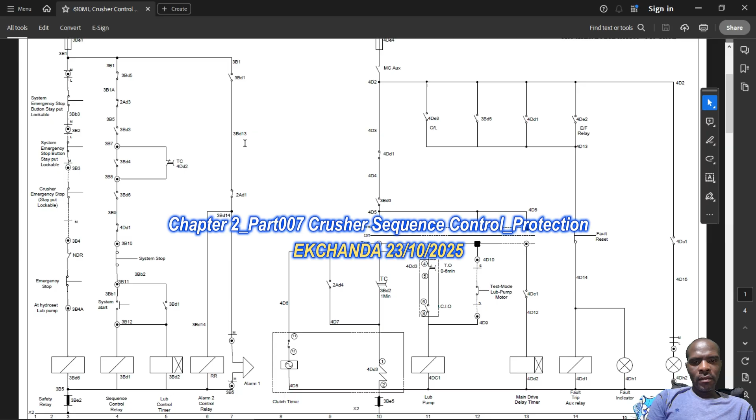Electrical control circuit for both the crusher lubrication control and crusher main drive control, because they are interdependent in the way they work. Okay, so ngamwamo na okay.

Apa I'll just be referring to ama rungs. Okay, ama rungs like ladder rung 3, 4, 5, 6 and whatnot. There are rungs in the way that they've been arranged, like ngama lolesha yale moneka kwa mass steps ya ladder.

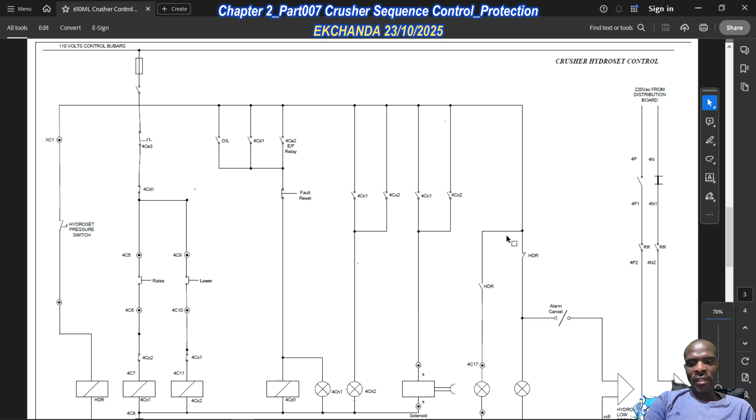So this is ladder rung number 3 because the 3 is down here. Okay, and then here you have the last ladder rung number 16. So mwala mona tuyonsaya yadi labeled ama rungs yonsaya. And also you notice that just underneath the ladder rung, okay, paleba ututuma contacts ututu the punch up.

These, whenever you see these, just know that my auxiliary contacts here are my control relays. Okay, that's where they belong. They are basically just auxiliary contacts for the control relays. So don't get confused about this, in the sense that, for instance, that control relay 3BD6 down here has been used in rung number 4, 10 and 29.

Mudi rung number 4 is being used as a normally closed contact. So 3BD6 is used as a normally closed contact. Actually, this was a mistake. It's supposed to be normally open, in the sense that

3BD6, the normal condition here, is constantly energized under normal operating conditions, which is why Ngaidi normally open and this is constantly energized, so this normally open contact is supposed to close, which is the only way mwalamba the system, because Ngamawomfia normally closed mudi rung number 4, then this will always be open tetimwambe. So mudi rung number 4 is used as normally open.

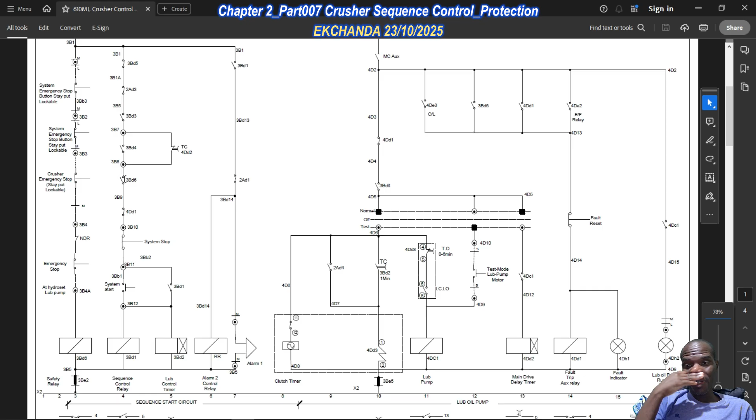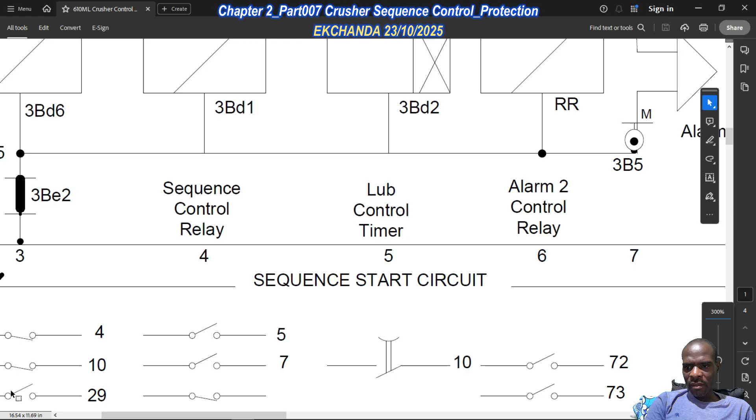Okay, and then ngamwaisado le shapari mudi 10. Okay, so 3BD6 is used as normally open, which is again the same thing, or maybe it could be... no, this is open, this is closed. So these 4 and 10 were supposed to be open. Okay, in this representation 4 and 10, they were supposed to be normally open.

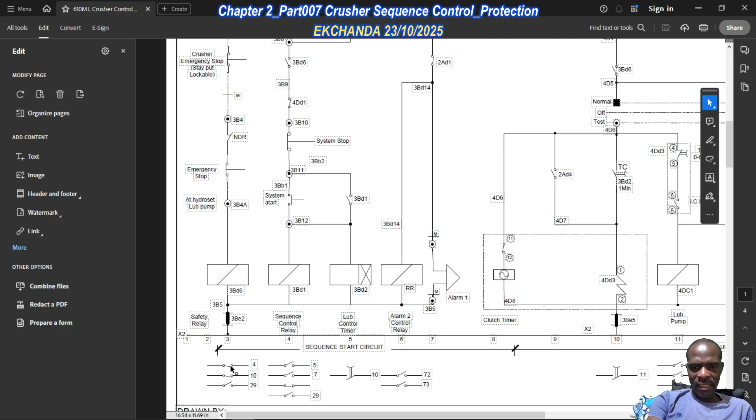I don't know if this part is editable. Apparently it's not identified as something which can be edited, so we'll leave it at that. But we just need to understand that mudi rung 4 and rung 10, they're supposed to be used as normally open, because clearly they've been used as normally open contacts. Okay, I don't know how they messed up this thing down here.

And then if we look at 3BD1, we'll learn that mudi rung 5 is used as normally open, rung 7 as normally open. So 3BD1, we're looking for rung 5. Yes, it's used as normally open. And in rung 7, it should also be used as normally open, which is correct. Okay, so now that we've got that out of the way, we can just briefly go over how this circuit works.

Okay, so mwala monat mudi rung number 3, it's just talking about protection, because yonsaya my emergency push buttons. Okay, system emergency stop, stay put, lockable. Okay, so it's those which when you press it latches and then you have to unlock it. Okay, but apparently in this case it's also got that lockable function. So that's the first part.

And then to simplify things, we just understand that mostly we can think of any control system as having a sequence part. Like for us, we'll think of it in 2 terms. There's a particular configuration which deals with the sequence, okay, how the system is supposed to start. Ichambila poni chisa, olopa konka chisa, and whatnot. Okay, so that's the sequence part. Then, kwaisabana part dealing na protection.

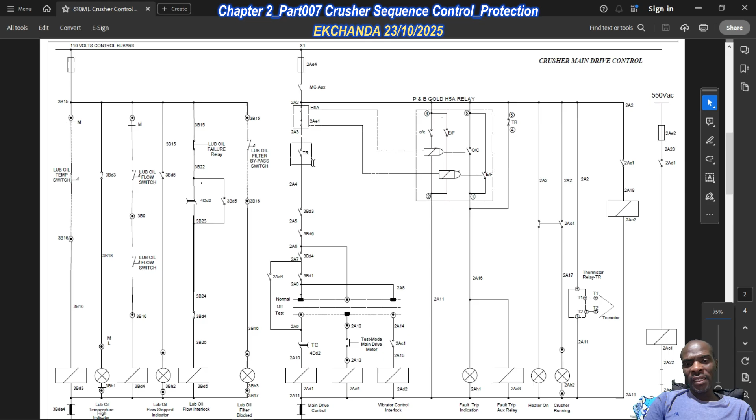And then TR is just the thermistor relay for the main drive, essentially talking about temperature protection. Okay, if it's healthy, we assume that under normal condition this contact is supposed to be closed. So you're coming down, 3BD3 was the lub oil temperature, I think. So this 3BD3 is the lub oil temperature. The lub oil temperature is normal, you close there. 3BD6, you haven't pressed the emergency push button, so this is healthy, you come down here.

3BD4, we are saying there should be a flow in the system. Okay, this is 3BD4, flow switch 1 closes, flow switch 2 closes, and 3BD4 is energized, and this closes right there. Okay, so which is where you notice that if there's no flow in the system, you cannot run the crusher. You can't just run it like that. So there needs to be flow in the system. 3BD4 is going to be closed.

3BD1 is the sequence control relay, like we previously saw. It's there, and then you're in the normal position, and then the main drive delay time has timed out, so this closes, and there you go, your main drive has started. So that's how this is going to work. Okay, so APA,

of your level. So the whole point is we can think of protection as being in two levels. We can think of level 1 protection, which basically disrupts the normal system stop sequence. Level 2 is a fault, yes, but it stops the system by way of the normal sequence. So level 1 disrupts the whole sequence of stopping, meaning you get a level 1 fault, or you actuate the emergency push button, the crusher main drive motor will stop, then the lubrication pump motor will stop irrespective of

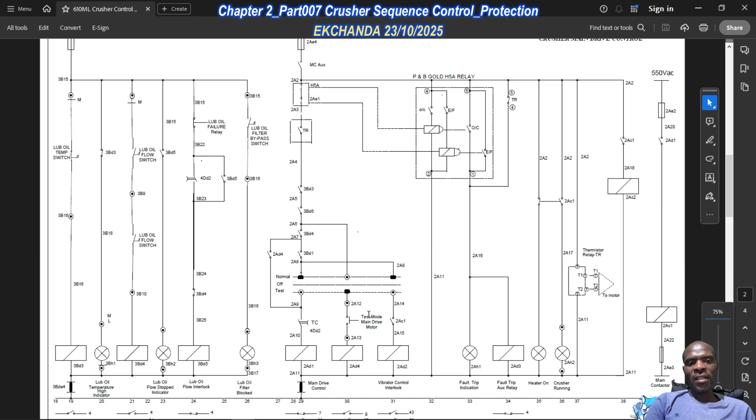the sequence. But if you get a fault, which we are going to refer to as level 2, in that case it's going to just function as a normal system stop in a way, right? Because it's going to just de-energize the sequence control relay and allow the system to stop normally. It's going to just allow the lubrication pump to power down following the sequence, as opposed to the level 1 protection, which just shuts down everything irrespective of the determined operational sequence.

Okay, so my point is, when we create our logic, we are first going to create two functions, right? Here first twalaita ati level 1 protection, here second twalaita ati level 2 protection. We don't have to, but we're just trying to have fun with this.

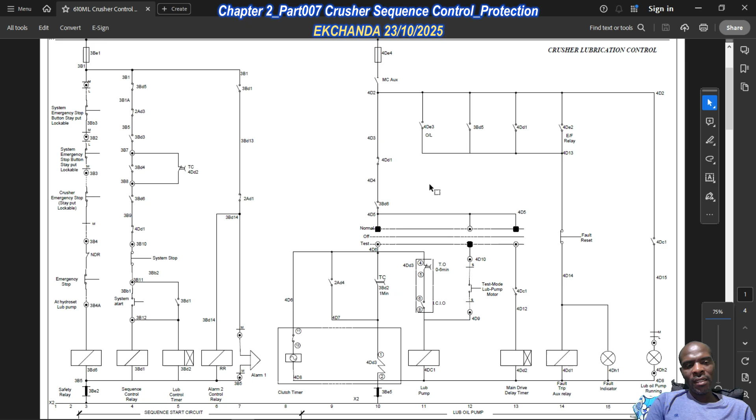So that said, we're going to insert an object, insert function, the language, let's use ladder, and then protection, symbolic name, we're going to say protection level 1. Okay, what do we have to say? It's, apparently, I don't know, maybe I'm online or whatnot. So we're going to call this as level 1 protection, and then we're going to insert another function. Or maybe let's just copy this.

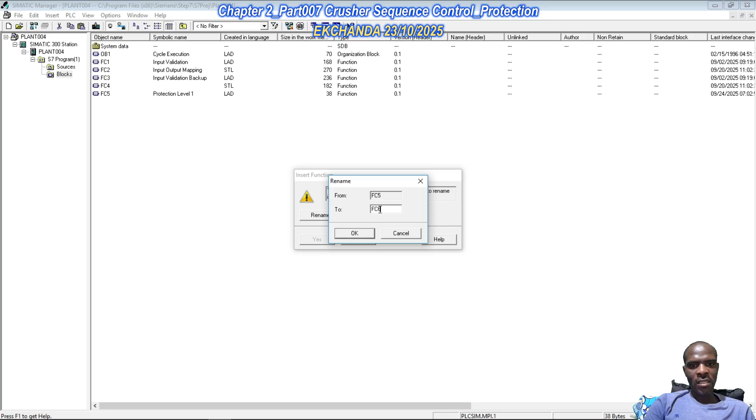We can copy, and then we can paste this, rename, we'll call this function 6, and then object properties, and then we're going to say protection level 2. Okay, this, no, we need to call this in OB1, but for now let's just skip that part.

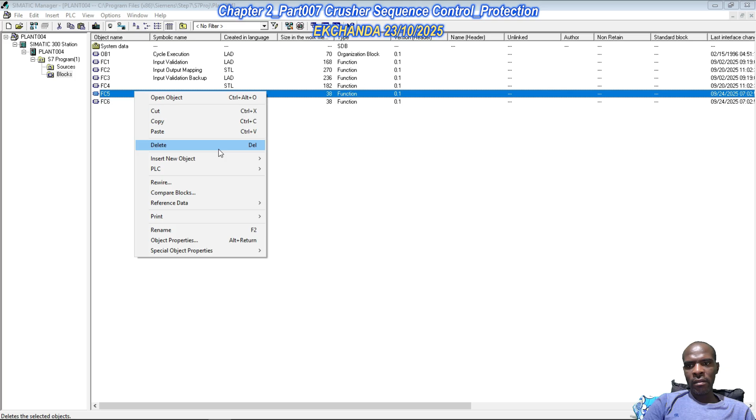Code block open. What is happening here? You're lost. It's just open. You're like code block open, but you're not in the OB. What's wrong with you? So options, view, overviews. Okay, this is what we get. So this is level 1 protection. Let's do this, and let's do that, so that we see them side by side.

Level 1 protection. Essentially, we're saying that we need all those functions or inputs which are going to stop the system immediately, irrespective of the sequence. So clearly, in rung 3, we just need what is being termed as a safety relay, right? So we're going to insert how many normally closed contacts? 1, 2, 3, 4. I don't know what NDR is because it wasn't really explained. There's no legend to explain what NDR was. So 1, 2, 3, 4, and then an output coil.

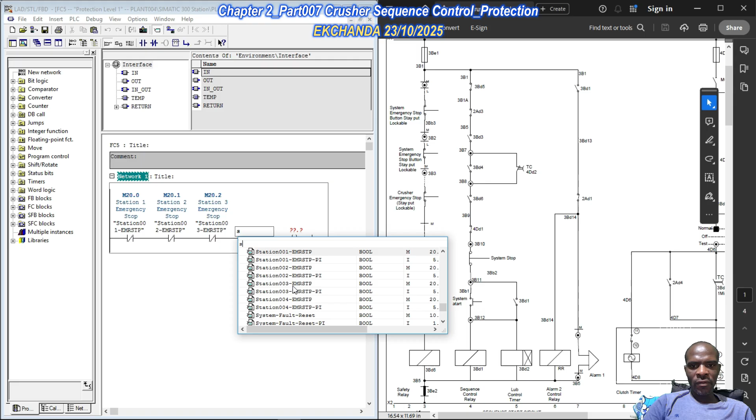And then what do we have? This is an emergency, insert symbol, station 1, if I remember correctly. Insert symbol. Should I just say station 2? But we need memory addresses. So this is station 2, and then we need station 3, and then we need station 4, right? Like so. And then we're talking about 3BD6. So let's see, 3BD6 is right there. So this takes care of the first rung, the one which is rung 3.

So the other thing we need now is just insert a network, and then we're going to think of which other system. So 3BD6 is here, and then 4DD1 is here. So these are level 1 events, level 1 protection events. So let's look at 4DD1 like so. You notice that 4DD1 is actually what?

Is actually a consequence of there being a fault in the lube system, okay. So this is the lubrication pump. So 4DE3 and 4DE2 are respectively the thermal overload and the earth leakage protection for the lubrication pump, okay. So this lubrication pump has got these two protections. And then 3BD5, like we previously said, was a no flow condition.

So it's also a level 1 event, because any fault that has to do with the lubrication pump is a level 1 protection event, which is what we have in here, protection level 1. Anyway, we just use them the way they are. But if you wanted to have fun with this, the question would be, what's the normal state of these inputs? Like, what's the normal state of 4DE3? What's the normal state of

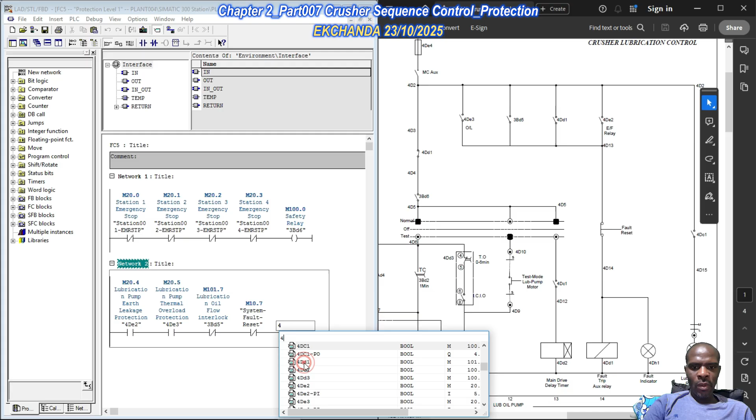System fault reset, and then we're going to have an output coil which is designated as 4DD1, which is this one here. Fault reset, and then they're saying we need to seal in through 4DD1.

So there are two ways we can do this. Let me just show you what I mean. We can do the same thing, but we could have done it like this. Okay, you're not Rockwell. You can choose to do it like this so that we don't have to seal in through 4DD1. But then we wouldn't be needing this.

But what are we saying? True, true, true. So the result of logic operation in this position will be true. This will be set, but we only need this to be set under fault conditions, right? So we're going to negate the result of logic operation after 3BD5. So if the signal state of this is true, true, and if this is not energized, the result of logic operation before the negation will be true. After the negation, it will be false.

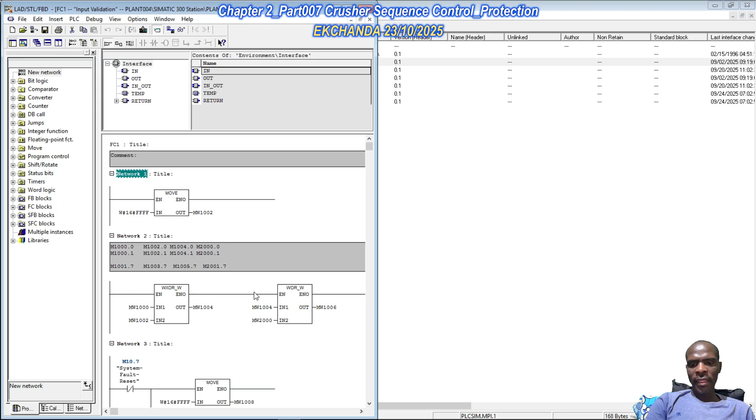So when we're talking about input validation, essentially whatever input there was, if the input had anything to do with protection, we needed to reset to normalize the system. So if there's a fault in the system, a fault in the lubrication system, the faulted state will be latched by way of the configuration we have created in these networks. So that's essentially what's going to happen.

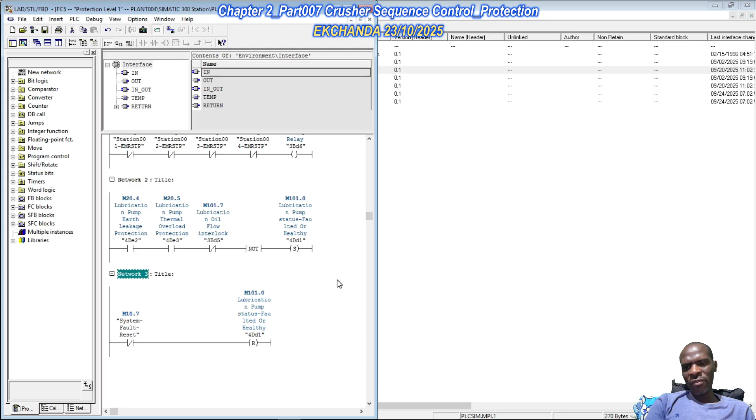So you'd notice that actually we don't need to worry about this, because of where we've come from. We know that if there's a fault, let's say by way of the earth leakage or thermal overload, the faulted state as passed on to the system is going to be latched, so we need to reset to normalize. Which brings us to what situation this is.

So I'm claiming that the normal state is supposed to be true, and if this is okay, there's flow, this won't be energized, so the result of logic operation at this point will be true. And then this won't be set. So that's the thing I'm trying to say, right?

But would it work if, as opposed to using a set instruction, we just delete this and use a normal output coil? There's nothing wrong with that. It can still work, but I'm thinking this would be more ideal considering what we have configured with the latching of the inputs and all that. Because if any of these get into a faulted state, this won't reset.

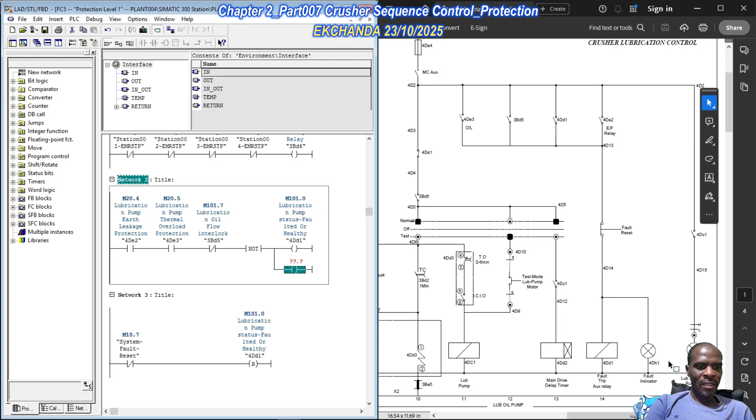So we get another output coil, but this time we're going to assign the fault indicator lamp for the lubrication pump, 4DH1. Like so. This is what we get. Then of course we don't need this as it is. I know it looks different, but I've done this based on where we've come from.

Again, let me repeat myself. When we're talking about input validation, we said that all those functions which had to do with protection, we were supposed to monitor the transitions in their state. Meaning, if there's a fault in the thermal overload, in the earth leakage protection, or any other protection aspect, or a transition in the emergency push buttons, to normalize the PLC input signals we needed to reset.

So if any of these come through as faulted states, they won't change state regardless of whatever happens external to the system, right? And because we're using a negation instruction in this position, if these change state from true to false, the result of logic operation at this point will be false. And then after the negation, it will be true.

And then you get your signal here, lubrication pump status faulted or healthy, in which case this is the fault trip auxiliary relay. So this is going to be energized, and then you know that the system is faulted. And then of course you get your indicator lamp right there. So that's how this is going to work.

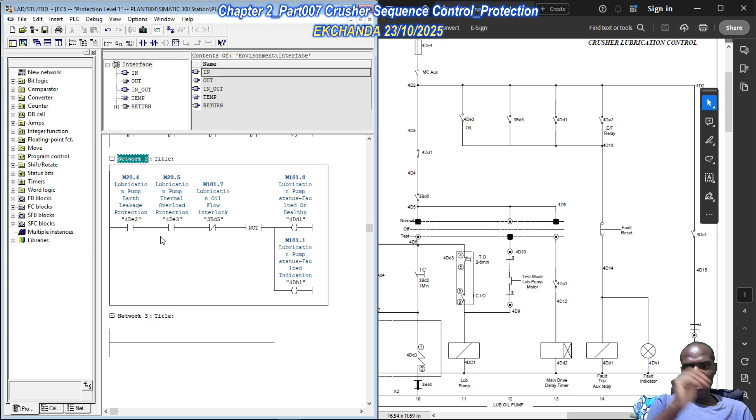This applies here because these were also mapped in the input validation function. So this takes care of that, and we are good to go with this network here, or this rung if you want. So we've taken care of this branch, it's of no problem. And then of course we've taken care of 3BD6 in network 1.

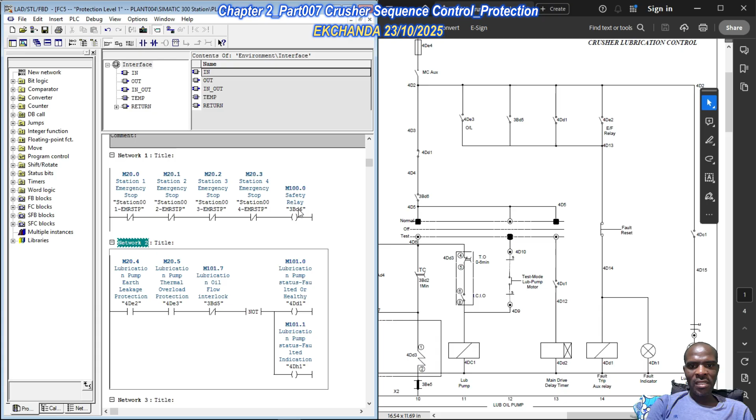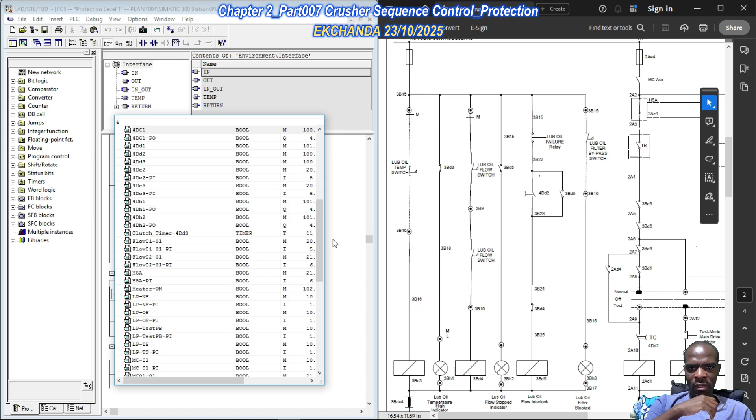In this particular case, we're saying normally open across a parallel connection, normally open like so, and then it's going to go to a reset. We need a reset. We've done this part, then we need 3BD4 as normally closed, and then of course we have 3BD5. So this one here becomes 4DD2. I think we did label this as 4DD2 under timers. What did we say about 4DD2?

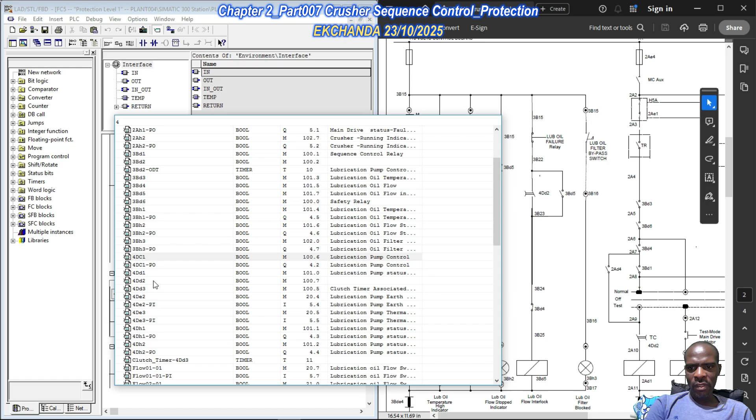Why is it like this? It's a timer, main drive delay timer, okay? So main drive delay timer was 4DD2, so meaning 4DD2 was classified as what? Just 4DD2 was classified as just an output coil for that timer, okay? So we need to assign this output to that particular timer when we get to that, okay?

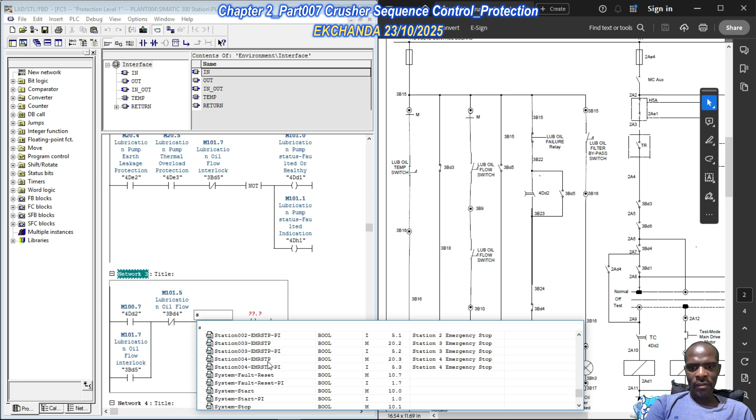So that takes care of 4DD2, and then of course 3BD5, and then what do we need? 3BD4, and then we've got system fault reset. Got a system fault reset, and then of course we've got 3BD5, okay? Got 3BD5. So we've taken care of this, right? Because we've got the lub oil failure relay. I think this is just a reset, which we're calling the system fault reset.

And then there's an OR configuration or a parallel configuration between 4DD2 and 3BD5. So 4DD2, 3BD5, and then in series with the flow, okay? The flow relay, the flow control relay, because 3BD4 is only energized as a consequence of there being a flow. So flow switch 1 closes, flow switch 2 closes, and then 3BD4 is energized, okay? So we have this.

Main drive delay timer. So by the time the main drive delay timer is closing, there should be flow. Okay, that's just what this is saying. Main drive delay timer, when that timer 4DD2 times out, it's going to close here. And then at that point, if there's no flow in the system, 3BD5 is going to be energized. Okay, so we have this. This whole thing here is this one in the PLC. Okay, so this is 3BD5.

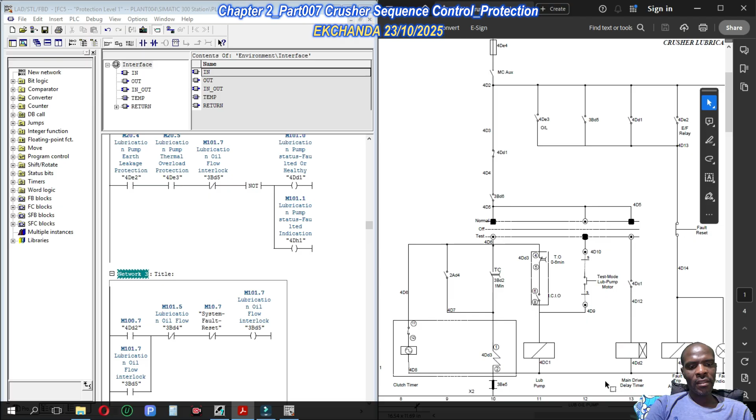We've taken care of 3BD5 as a system level event. So this is 3BD5, and then of course it's supposed to also be in the lubrication control, okay, which is why it's a level one protection event. 3BD3. So 3BD3 is what? Is lub oil temperature. Okay, so lub oil temperature is this one here. I'm calling it the lub oil temperature because of the way it's being brought in. Lub oil temperature switch, then there's 3BD3.

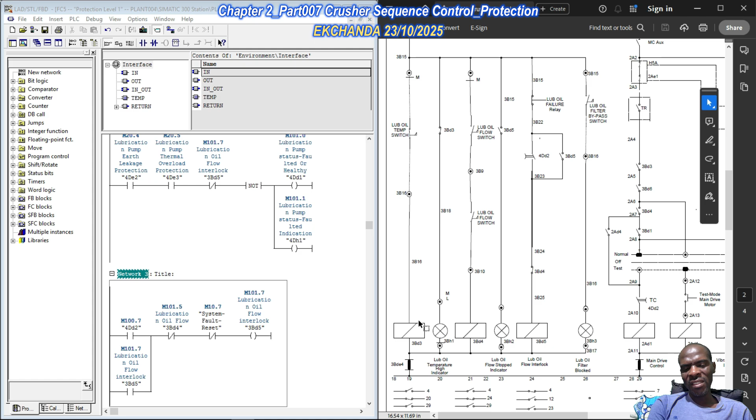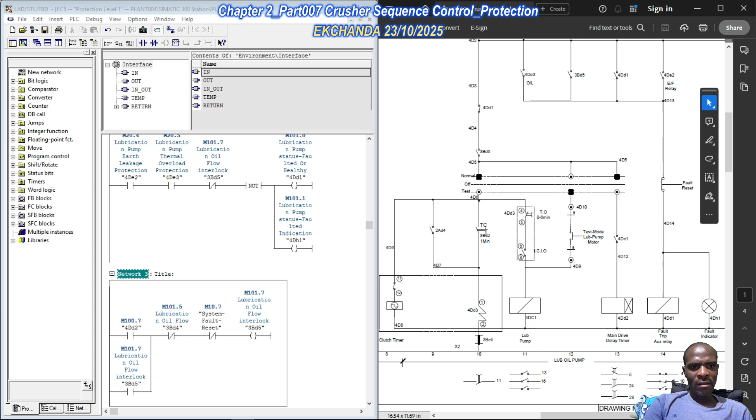So this is basically the control relay monitoring the temperature condition of the oil. Okay, so if it's being used in this condition, it means the normal condition of 3BD3 as a control relay is supposed to be energized. 3BD3 has got no immediate effect on the operation of the lubrication pump, because if you see in this run, from top we just have 4DD1, 3BD6. There's no 3BD3 anywhere in this. Okay, so clearly 3BD3 is not a level 1 protection function, but level 2.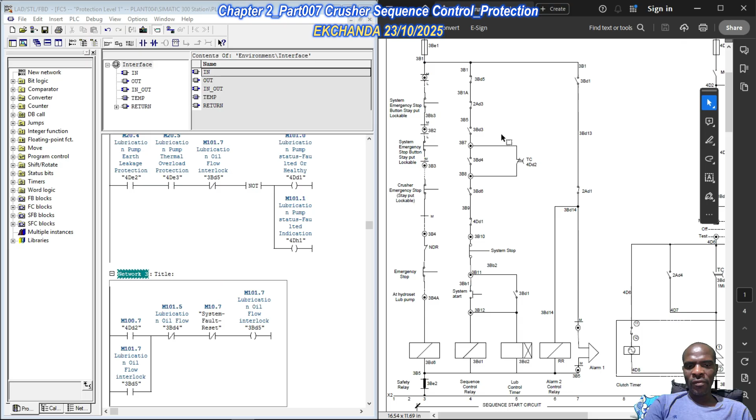Okay, level 1 has to stop both the crusher main drive, and then it has to stop the lubrication pump irrespective of the sequence. A level 2 protection function, according to us, is just supposed to stop the system normally, in the sense that it's not a fault directly related to the lubrication pump. It's a fault directly related to the operation of the main drive itself. Okay, whether thermal overload or earth leakage or whatever it is.

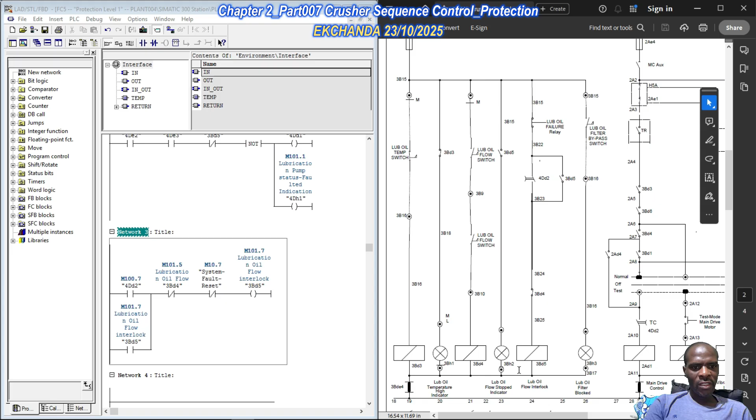Okay, so 3BD5 is used here. 3BH2 as a lube oil flow stopped indicator. Okay, so we're saying if we energize, we can do it like this, put an output coil, and then do what? 3BH1, is it 3BH2? Okay, so we can do 3BH2 like so. Okay, now 3BH2, and then pause.

Okay, so we've taken care of the lube oil flow stopped indicator, okay, which is the one associated with the auxiliary contact of 3BD5, but internally in the PLC we just do it like this. Okay, what do we have? What else do we need?

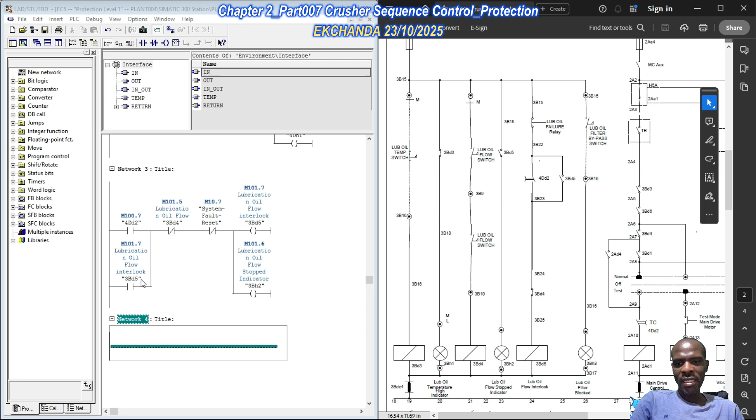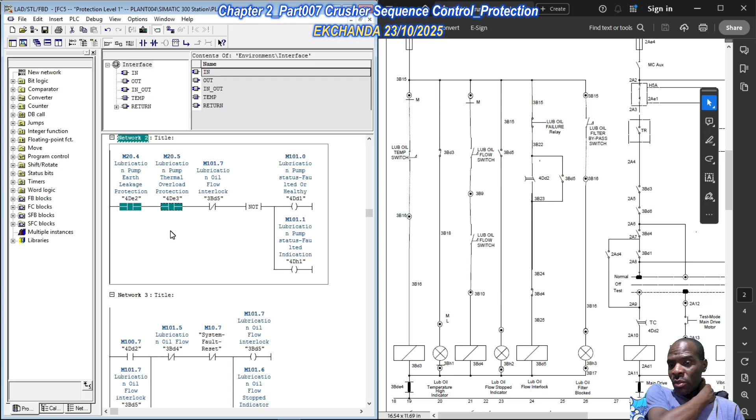Again, at this point you're like, but why are we using a seal-in contact? Because the difference is these contacts are a consequence of being physical inputs, which is why they're already mapped in the input validation, and that input validation is at that reset function configured in that particular network. This is different in this case because all of the associated addresses in this network are basically resultant conditions. They are not physical inputs, so that's the difference, and that's why we need to seal in like the way we've just done.

So up here, we've taken care of what? We've taken care of rung 24, which is the lube oil flow interlock 3BD5, and we've taken care of the one which is talking about the indication, lube oil flow stopped indication 3BH2. We're not going to leave 3BD4 in this function, which is being called protection level 1. So we're not doing anything with this rung here. Rung 21 will not be touched.

3BD3 is actually a level 2 protection event, because if the lubrication oil temperature is high, it's just going to stop the sequence control relay, and the system will stop normally. So it's a level 2 protection function. So we were not going to deal with rung 19 and 20, but rather just rung 24 and 23.

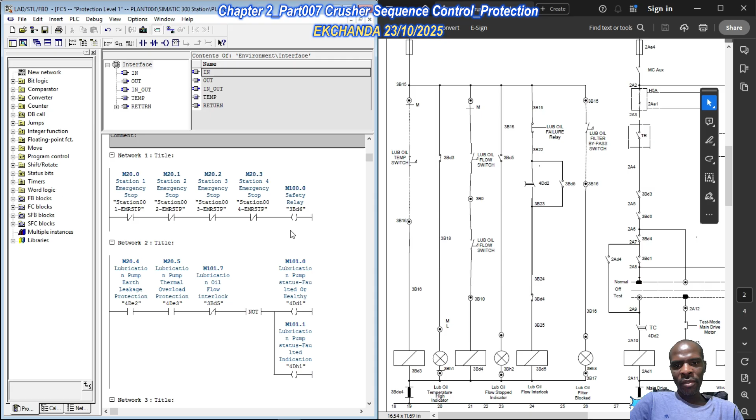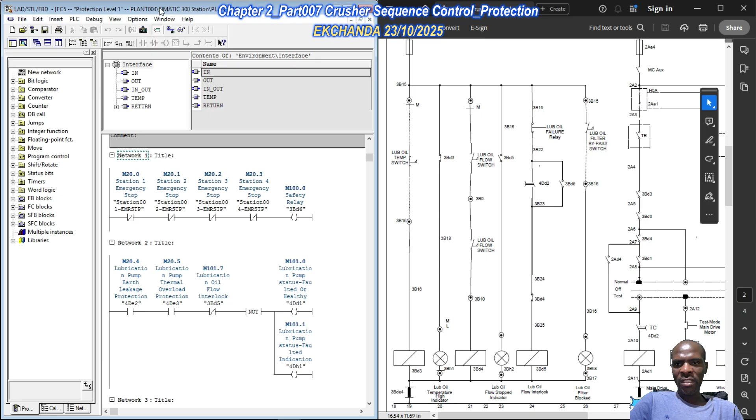So now what we'll do is we'll get to answer one very fine question. What's the normal state of 3BD6? 3BD6. In this particular regard, I feel we need to use a negation, because the normal state of these, because of the mapping that we've actually done, or rather, let me just show you something so you're not like, oh, but what are you talking about? So this is protection level 1. I'm going to close it for now.

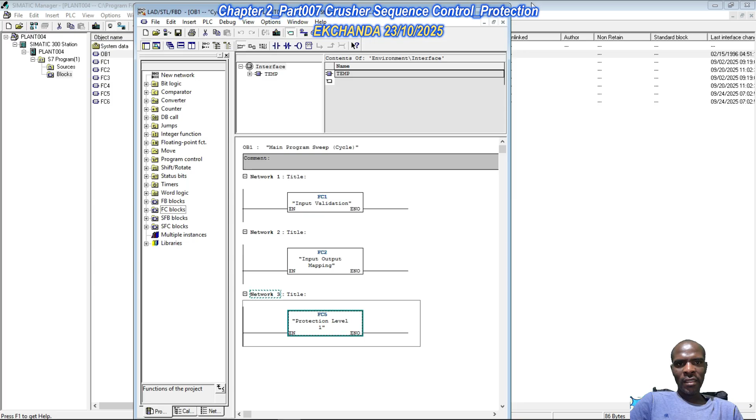Protection level 1 needs to be called in OB1. Go to insert a network, and then functions, protection level 1. I think this is protection level 1. We need that. This is station 1 emergency. Station 1 emergency relates to this one here. But you notice that the signal state being passed on to the station 1 emergency stop memory bit, because we are programming using memory bits, what's being passed on to this is a false state.

This only attains a true state if you actuate this. It attains a true state if you unlatch, still true state. But you need to reset to reset the faulted state of the system. So Mukati, the way we did the input validation basically makes it so that some signals to do with protection we are wiring through normally closed contacts. When they come to the PLC, we pass them through the networks for input validation. On the output side, the healthy state is supposed to be the false state. I hope that makes sense.

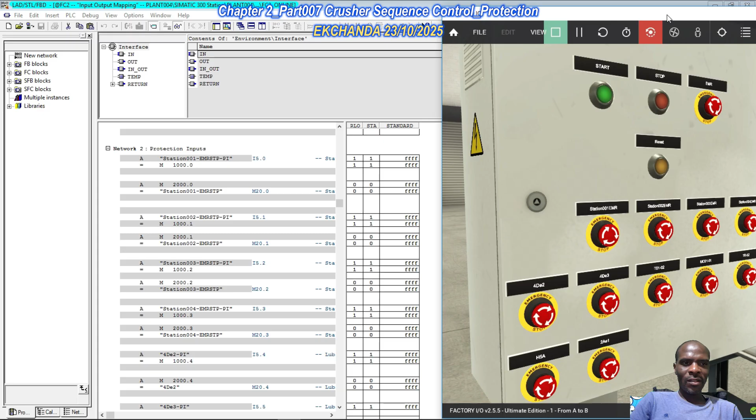I really hope that makes sense, because if you understand that, then that will explain why this is like this. So where external protection instructions are concerned, we need to negate this state. So maybe we just copy this, paste there, and then download this again, so that now 3BD6 will have a false state. And then what else do we need? We're being told that we haven't mapped. I think it's the same.

It's the same thing with 4DE2 and 4DE3. So let's look at 4DE2. Let's look at 4DE3. Okay, so we're actually getting those signals. So essentially what it means, ladies and gentlemen, is that if we're going to use these protection functions internally in our logic, then they need to be wired as normally closed contacts and not normally open. Okay, so that's our truth, like so.

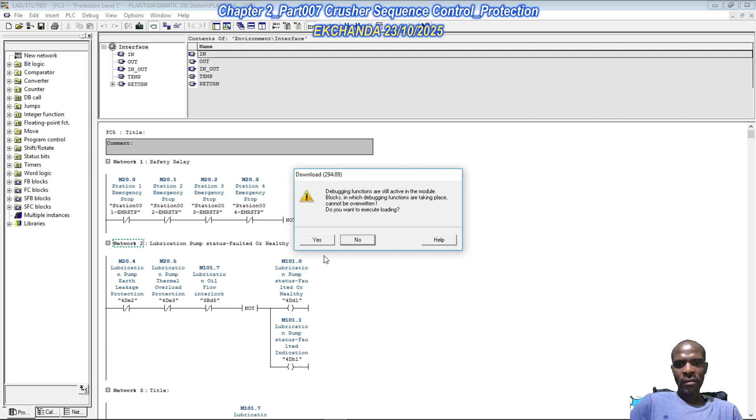It needs to be done like this. Okay, so now this takes care of our little issue.

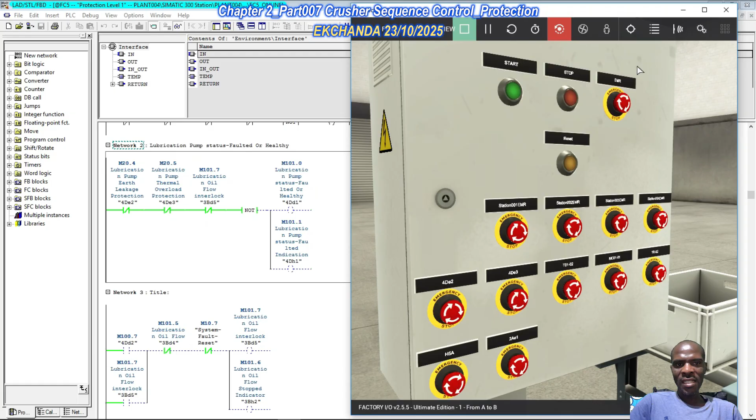Okay, now what I meant when I said we don't need the reset in this function, or in this network, was this: if 4DE2 is actuated, you notice that the lubrication pump status faulted or healthy, this lamp will come on. And it will stay so even if I normalize this. Nothing happens, right? Nothing happens unless I do a reset. Then that's when the state changes. Same thing, it may look different, but it functions in the same way. Okay, so that takes care of this.

And then for 3BD5, what are we saying? 3BD5 is okay like this. It's supposed to be in this de-energized state, right? So what this means now, ladies and gentlemen, if we're going to get out of this protection level 1 function, is we just use normally closed contacts. De-energized, then the output, and then options, symbol table. On the output side of things, we went as far as memory bit 103.0 as a normal output.

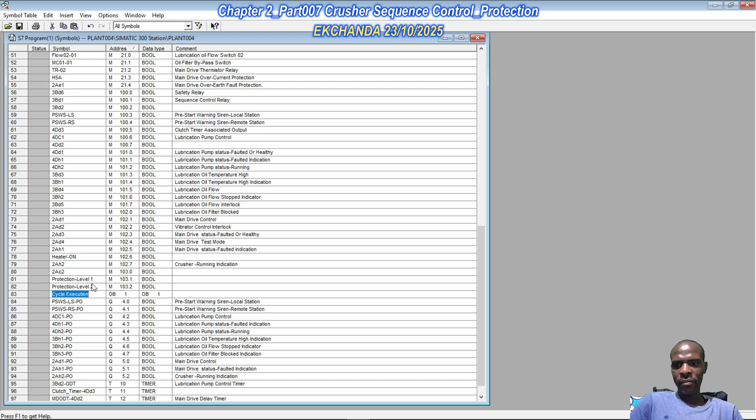So let's do insert symbol, and this we'll just call it protection level 1. Then I know at some point we may need to come back here, insert symbol, copy that, paste there, protection level 2. Then we'll save this, close that, so now all we need is get this, paste there, get this one here, paste there, get this one 3BD5, paste there, and then protection level 1, and then we need to negate. Seeing as how we already have this, we'll get that true, false, like that. Save this, download, and then we have something like this.

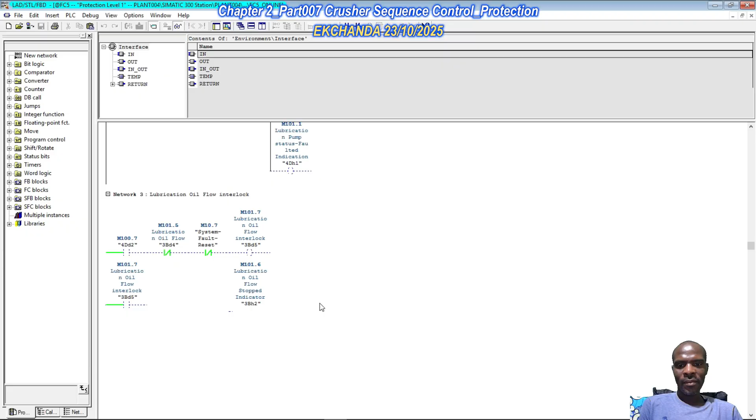So when the system is healthy, like everything is okay, wherever we need a level 1 protection event, all we need is to come and pick this, slap it on there, and we're good to go. So if the program was to grow, you're going to introduce other additional protection functions. You just come in this particular function 5, add your network, add your condition, and still maintain the protection level 1 contact wherever you've used it.

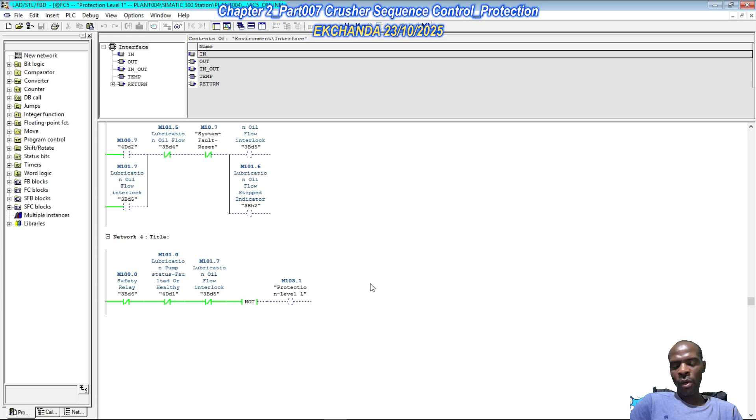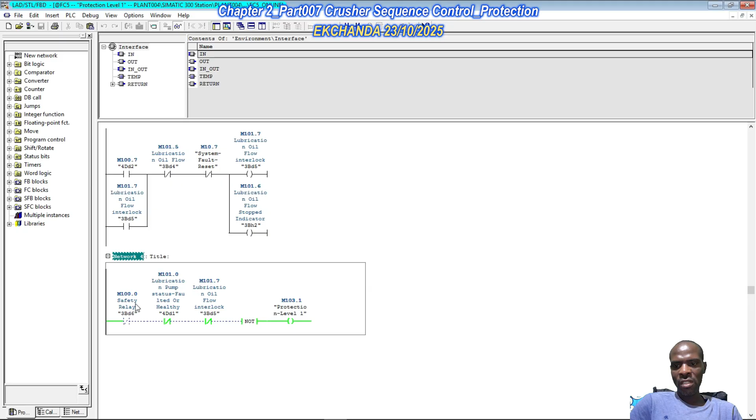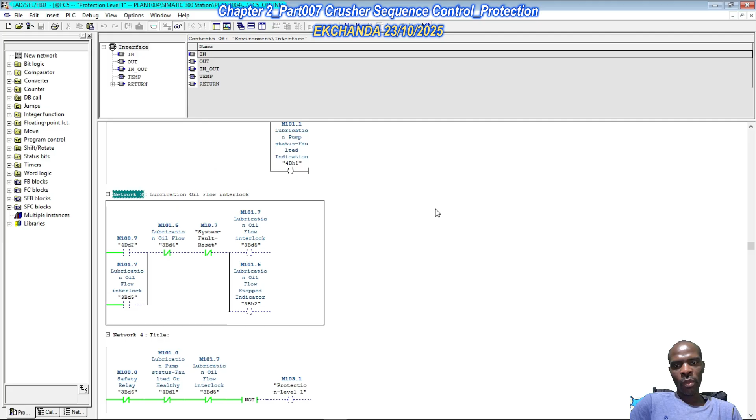So how this is going to work: station 1 EMR, this one here, actuated, and then protection. So we've got a level 1 protection event, and the consequence is 3BD6. We go to where 3BD6 is. We see that station 1 emergency stop has been actuated. We come back here in Factory IO, reset this. We still have the situation persisting, do a reset, the system resets, and we're good to go. So instead of having these funny things like 3BD6, 4DD1, 3BD5, we'll just have a single associated contact of this address, memory bit 103.1, protection level 1.

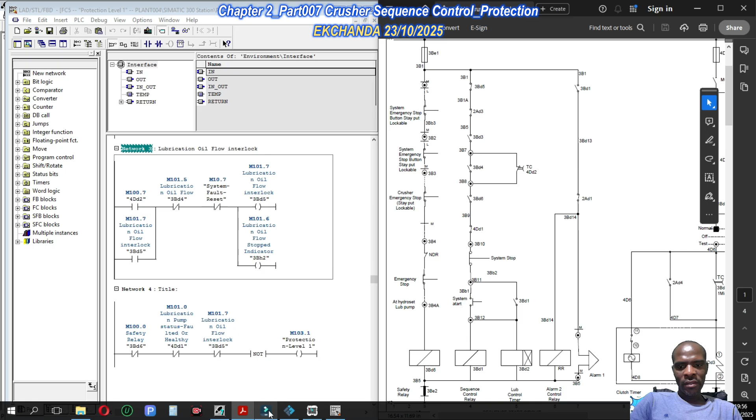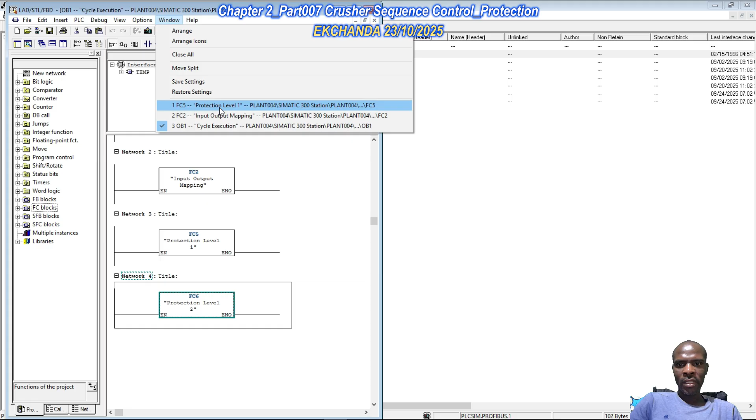Okay, and that's that. So we move on to the second function, which is that of protection level 2. Like as always, we need to insert network, get to functions, protection level 2, drag it on there, save this window, protection level, code block open. So we're here, we're going to do the same thing.

What we're going to do is come here and pick all those level 2 protection conditions. So we said 2AD3, 3BD3 were level 2 protection. We're going to start with 2AD3, which we're going to get from the main drive. So we go to the main drive and look at 2AD3 first. 2AD3 is this one here. Whatever this thing is looking at, oh, but it's so complicated, what are we going to do? We really don't care. The only thing we need to pay attention to is, we said the

TR. This is a thermistor device for the main drive. The crusher main drive motor has got a thermistor installed, so that you're able to monitor the temperature and everything else. And you notice that 2AD3 is never supposed to be energized, because if 2AD3 is energized, it will open this rung, and then you won't be able to start. So the normal condition of 2AD3 is de-energized. That's what you need to remember. So for the thermistor, we're using a normally closed contact. If we choose to use a normally closed contact as a signal to the PLC, it will have the same effect as any other protection function. The same thing goes for the thermal overload and the earth leakage protection for the main drive.

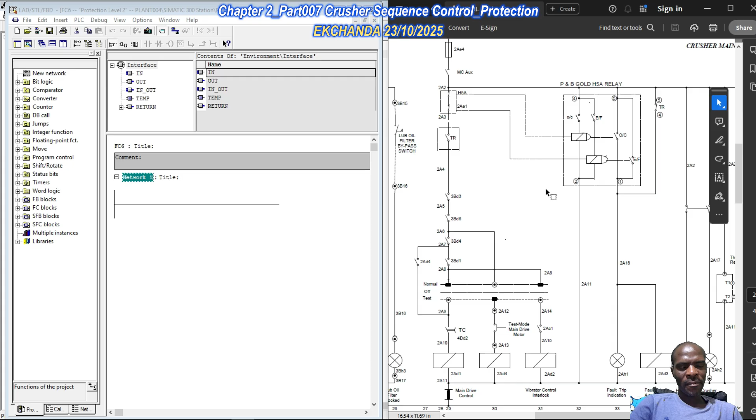So what do we do? Let's do close. Do we do negation exactly like the other one, then an output? So what do we have? We have 2AE1. We've got 2AE1, and then we've got H5A. And then what do we have? We've got TR. Main drive thermistor relay TR.

What's your issue? What's this? T01. Okay, so it's supposed to be temperature. We bought temperature. Okay, so the one we want is the main drive thermistor relay. Okay, so I think this is it. The main drive thermistor relay, TR02.

Main drive thermistor relay as an input. Okay, so that takes care of this TR, right? And then of course we need to control 2AD3. Okay, so we need to control 2AD3, and that's the end of this. Okay, once again, we don't need to worry about the reset. Okay, even though the reason why there's no reset in rung

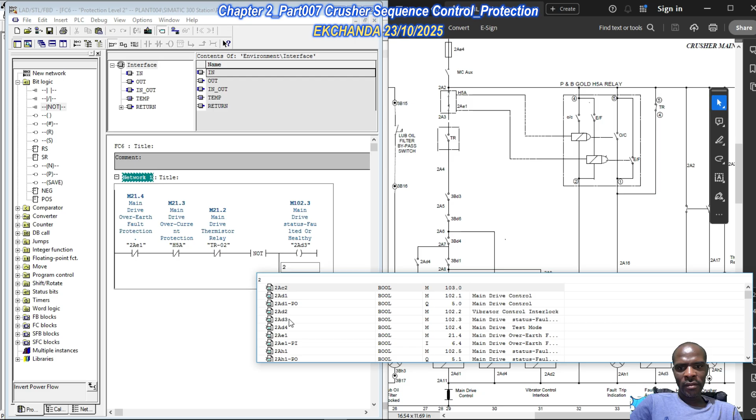Okay, so we've taken care of this, and then we've taken care of the thermistor, and then we've taken care of 2AD3. So the only thing we need to take care of is 2AH1. Okay, again, we can either do this, put an output coil, call this as 2AH1 like so. So that takes care of the fault trip indication lamp, and that takes care of 2AD3 as a fault trip auxiliary relay, as so called.

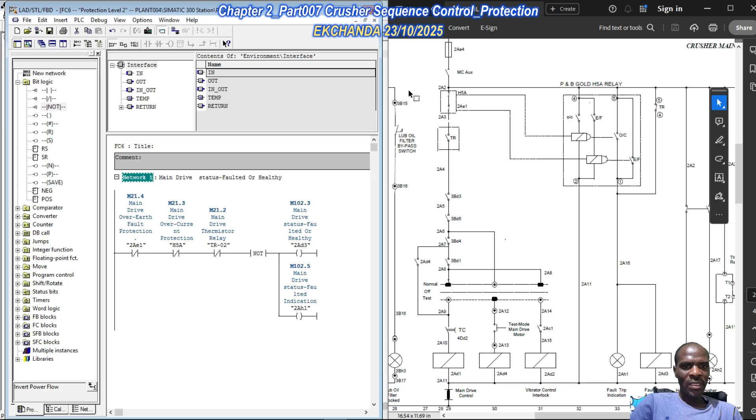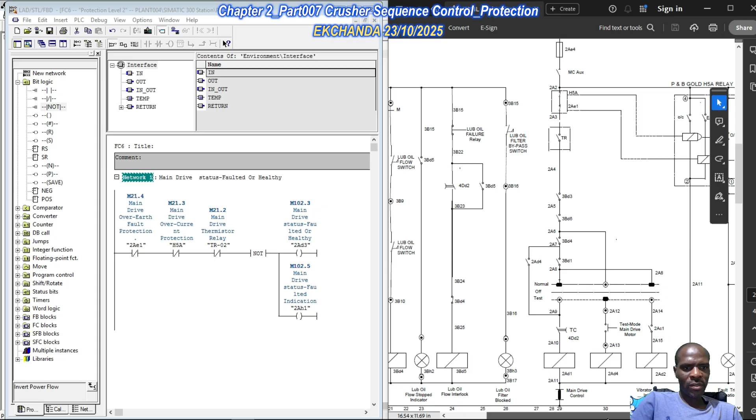Okay, 3BD3. That's a level 2 protection. Okay, so don't need to worry about that. The key thing is we've taken care of this part. Okay, so let's go to the left. Which event qualifies as a level 2 protection event? So let's insert a network. Then we're talking about the lube oil temperature. Okay, let's do what? The lube oil temperature 3BD3.

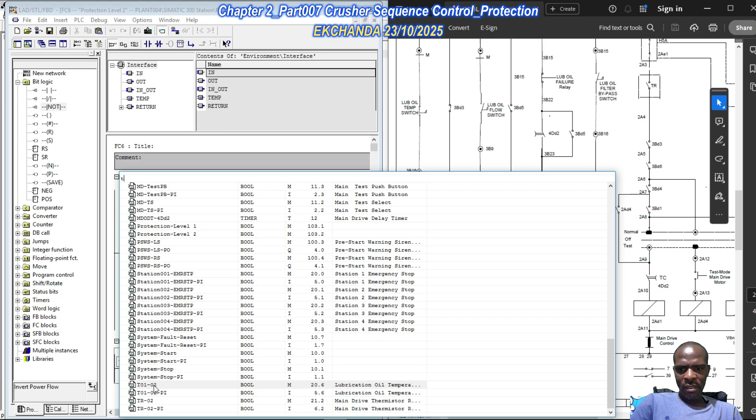Okay, let's see what you have. Lube oil temperature. Okay, lubrication oil temperature. I bet this is what this is. So when we say lube oil temperature, again, you need to understand that whether it's a thermocouple or an RTD, it's going to be connected to a temperature controller. That temperature controller is going to have auxiliary contacts. We use normally closed auxiliary contacts, wire them to the PLC, and then apply that to the input validation, meaning on the output side of that input validation, the output signal is going to be false.

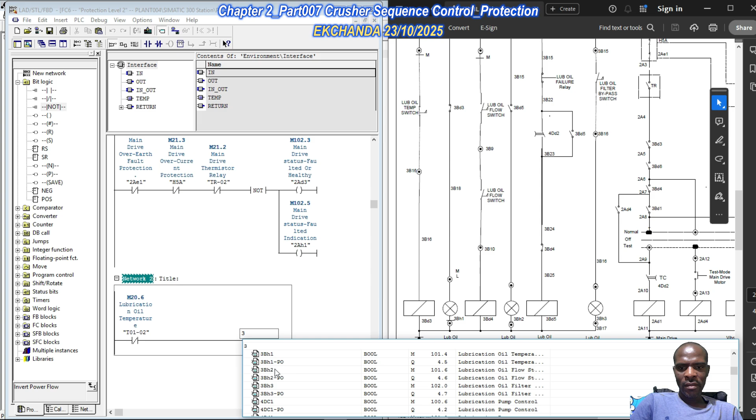So we need to use it as normally closed here, and then assign 3BD3. Okay, then assign 3BD3 like so. Okay, so this takes care of this rung. Okay, and then of course in the next rung we're talking about lube oil temperature high indication. If this is used as a normally closed contact, meaning the normal state of this is always energized.

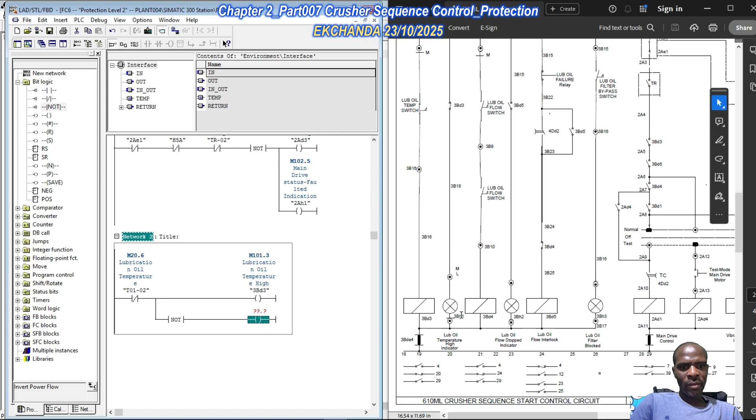Okay, so if we're going to accomplish the indicator lamp, we can do it in two ways. Okay, we can either negate. Okay, we can negate this. We can do it like so, and then use an output coil like so, and then we'll say 3BH1. Okay, so 3BH1 like so. Okay, we can do it like this, or if you did not want to do it like this, you could have done it like so.

It's the same thing. Okay, and then you do it like this. Essentially what we're just saying is the normal state of this is energized. Okay, so when this is energized, meaning the output coil with the bit address M101.3 is going to be true. If this is true, this is going to open, so that the result of logic operation at this point will be false.

And then when there's an over temperature externally, that input signal will be false, and then of course this lamp is going to be true. Okay, this only makes sense if you take time to understand how the input validation works. Okay, so this takes care of the lamp, the lube over temperature high indicator. Okay,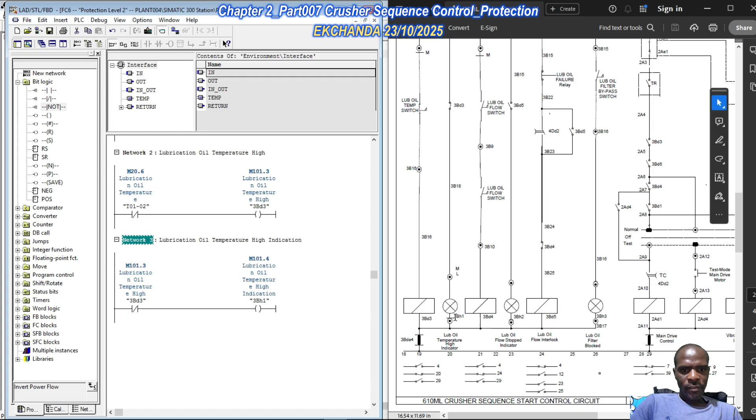the only other thing we need to configure is the flow. Okay, so flow doesn't directly fall under level 1 or level 2, but it does influence a level 1 event, as in brought about by 3BD5. Because if there's no flow, or flow is not confirmed but the lubrication pump is running and the main drive delay timer is timed out, then 3BD5 is going to be energized, and when 3BD5 is energized, it will de-energize both the

normal sequence. Okay, so 3BD5 is going to open the sequence control relay, and then yes, here. Okay, so 3BD5 closes, declared as a fault. 4DD1 energized, 4DD1 opens this, and 4DD1 opens that position. So level 1 protection event.

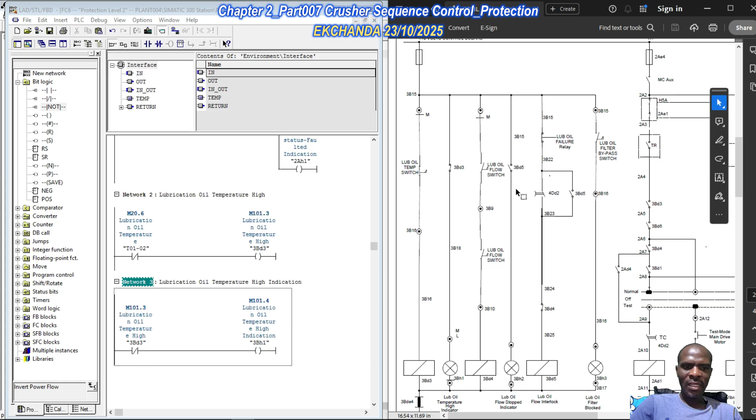We know that the flow is a key element as a condition for 3BD5, but for now we're not going to classify it as a level 1 protection event or as a level 2 protection event, which means now we've taken care of rung 19, rung 20, rung 23, rung 24, and then rung 33 and 34. Okay, and then, let's see, 2Ah1 is done. This is 2Ah1, 2Ad3. So this is done.

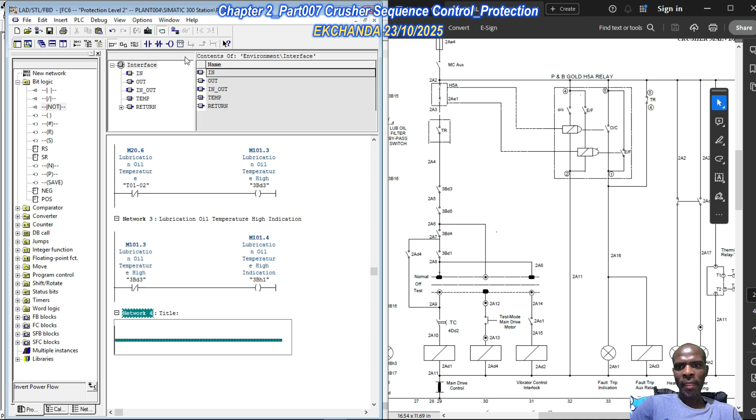So where level 1 protection events and level 2 protection events are concerned, we're done. Okay, so we just need only insert a network and then do the same thing we did previously, like normally closed, output coil. Or do we negate? We also need to negate. Okay, we need to negate, and then output coil. Okay, so we're going to have 2Ad3. So this is 2Ad3, then 3BD3,

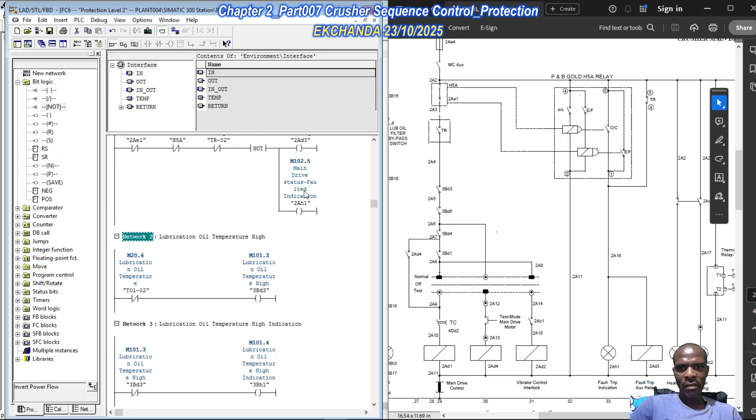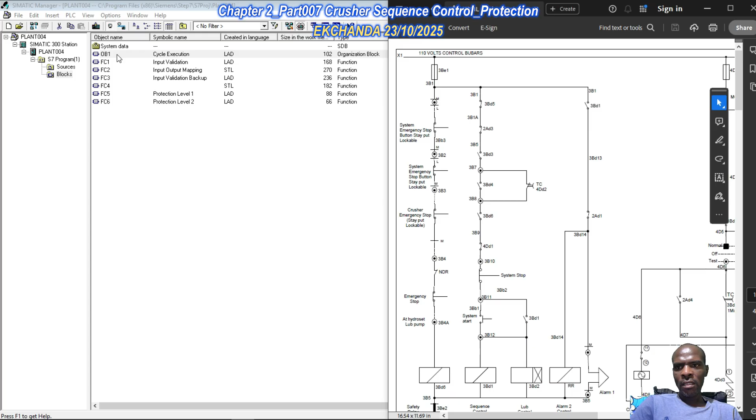this is 3BD3. So it's just these two conditions which qualify as protection level 2, right? So if you've got any other level 2 protection events, you come and add them from here. Okay, so that's done, and I think we've already called this in OB1. So protection level 2, protection level 1. So let's download this to the simulator. Okay, that's done. We just need to look at level 2 protection. Then let's monitor this.

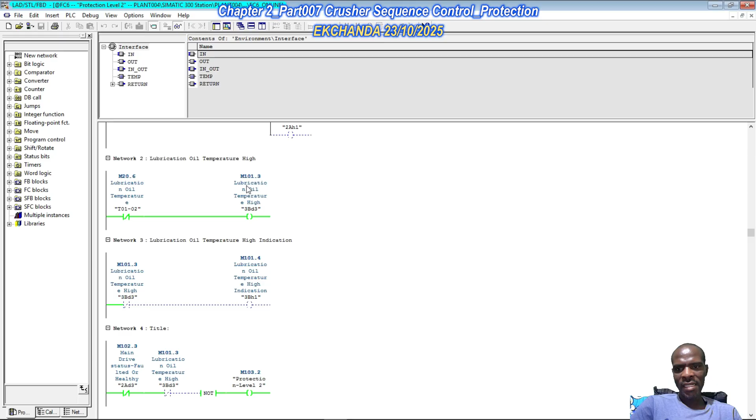Lube oil temperature high. Okay, so this is basically the behavior we expect, and then this is what, lube oil temperature high. T0101, T0102. So was this mapped externally? T0102, let's see. Yes. So this was T0102. So this was actually mapped. Okay. So if T0102 normally closed this,

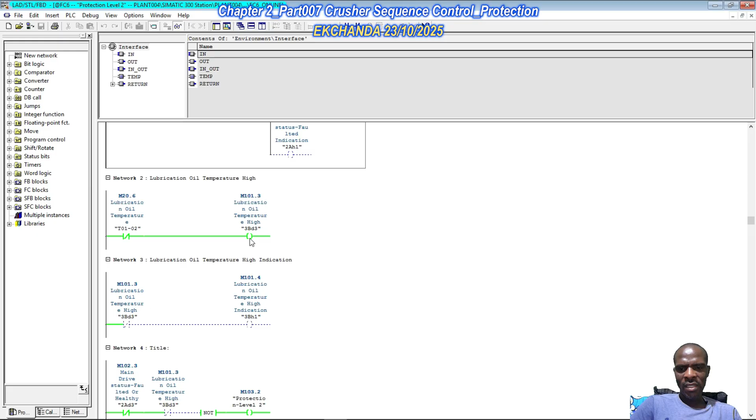and then wherever we use them in series, we need to negate. I mean, there's a whole lot of negation going on. Okay, so because we said we need to use this as a, 3BD3. Better we use it as a, because in the electrical schematic, 3BD3, the normal state of 3BD3 is energized. Okay, so like this, 3BD3 is energized. That's the normal state. We've put it into the PLC. Now 3BD3, this is the normal state.

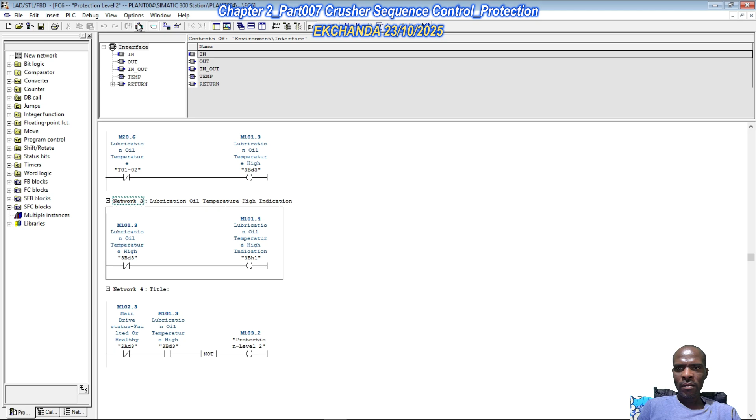Okay, so if this has to work out and we don't want to use the negation in this network, what we can do is we can use a normally open contact in that position. Okay, delete this, and then we have something like this.

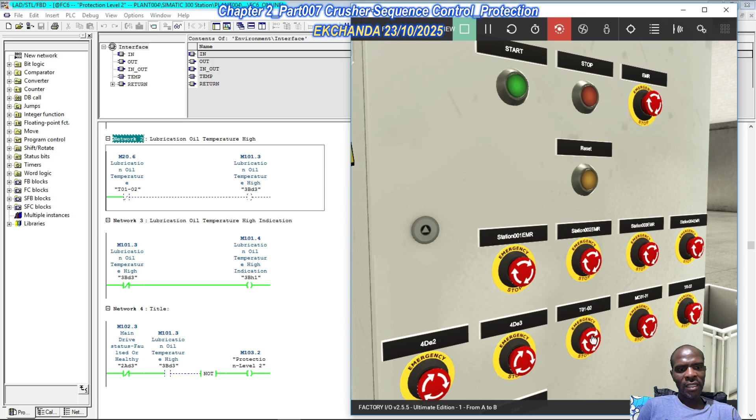Okay, so that if we have an over temperature in the lubrication oil, you have this thing called a level 2 protection event, and then this lamp which is saying lubrication oil temperature high indication is going to be true, so that you know that the temperature is actually high, so that if there was a loose connection in the system and then this normalizes somehow, the system will still remain latched, so that you need to come and do a reset, right?

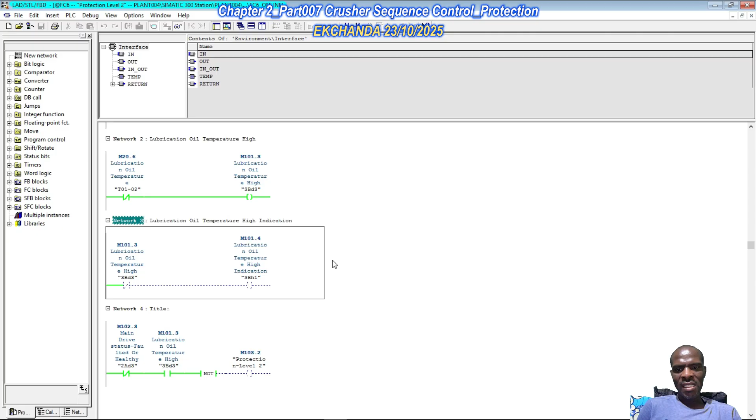So that takes care of level 1 protection and level 2 protection events. The reason why we have done it like this, now it's scalable. You get any other condition, identify it. Is this protection level 1? Is this protection level 2? You add that to the specific function, and you're good to go.

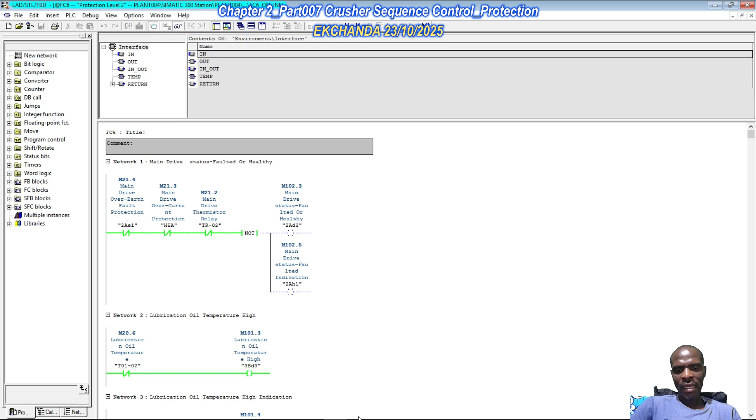Okay, so this basically ends this classification of whether a protection function is level 1 or level 2, which signal qualifies as a level 1 protection event, which signal qualifies as a level 2 protection event. So hopefully in the next part we just talk about sequence.